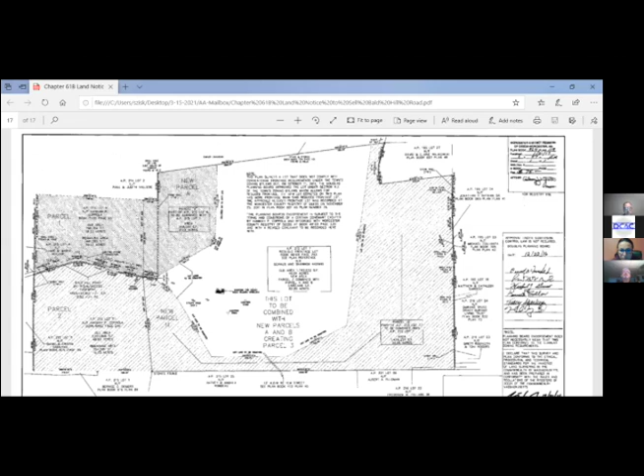So we could request the town to purchase that for $110,000. It's pretty isolated, I don't think there would be any use in it.

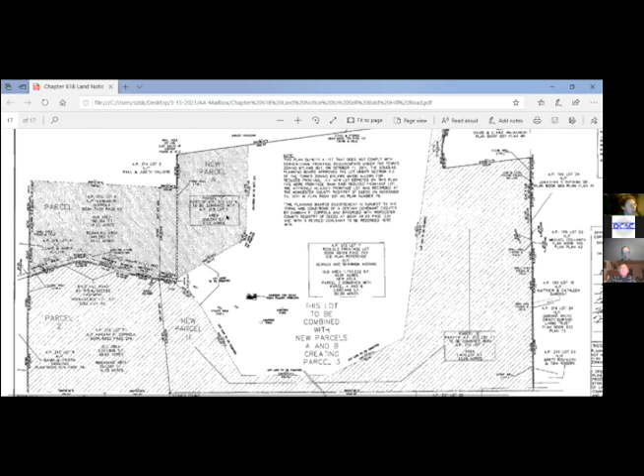I'm still trying to locate it, is it on the screen? Yes, you've got it on the screen. I also have the Bald Hill area jpeg up because that was on the Google Drive, and I'm trying to locate it in the town. All right, let me bring up the GIS. Off of Yew Street, and it's south of Snet, but not anywhere near Snet. It's many, many house lots away from that. It's a bit away.

Unplug your computer. Did you eat everything?

It doesn't look like Open Space had a meeting yet. There's nothing that says they have to go before us or after, there's no order, it doesn't matter, we're all independent of one another. I was just curious if they made a different recommendation, but based on what I'm looking at, I can guess what their recommendation would be.

Okay, so I'll entertain a motion to recommend to the Board of Selectmen to not exercise our rights for first refusal. If there are no questions, I would make that motion that we recommend to the Board of Selectmen to not exercise their right of first refusal.

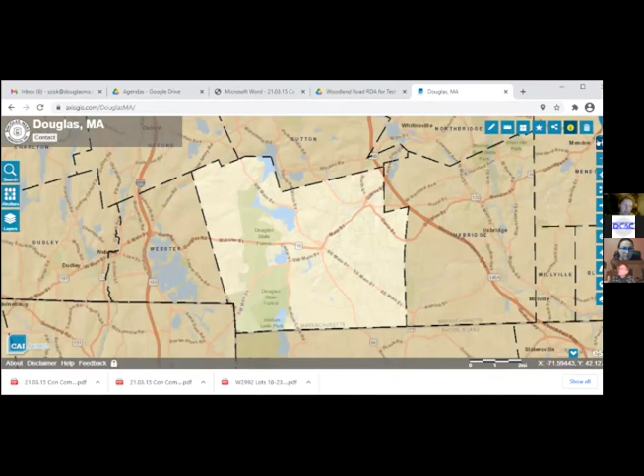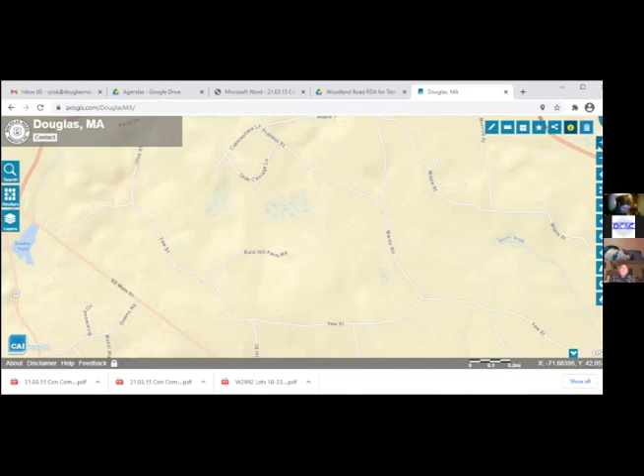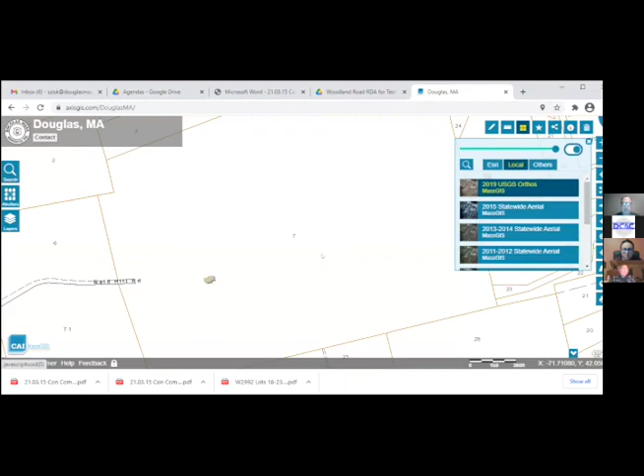As far as the wetlands, like at the entrance, there was nothing mapped. So besides the species, I don't know yet. That's pretty easy to figure out with the overlay. Just trying to get back there. So you can see there would have been noted some wetlands on that A&R plan, so they don't have any at the entrance at least. No, at their entrance, no. I'm just saying that would be the only way we would know jurisdictional areas for like a BVW or a stream that would have been shown.

Is this coming up on the screen? Yep, all right, this is it. So I know there's a wet area down below on this side. This is the area up in here. Could you just put the overlay on? The layers. Thank you.

Slow, yeah I know. See that now? Yeah, so we're talking about 6, correct? 7, oh 6, yeah, sorry, we're talking about 6. So there's nothing at the entrance. It's across the way, which that one is also for sale, so that one will be coming in front of us too, eventually.

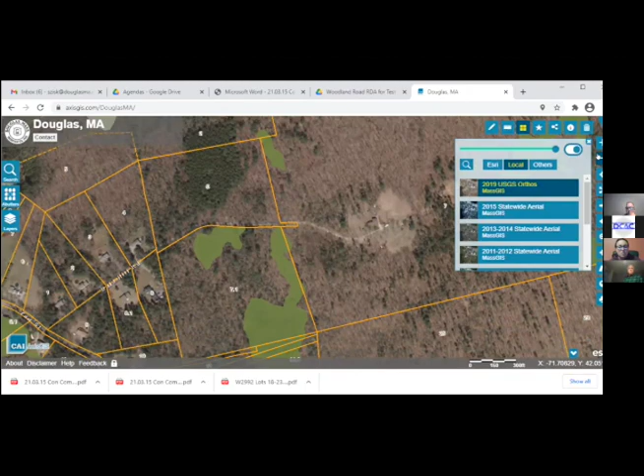Mark, do you want to see the wildlife overlay?

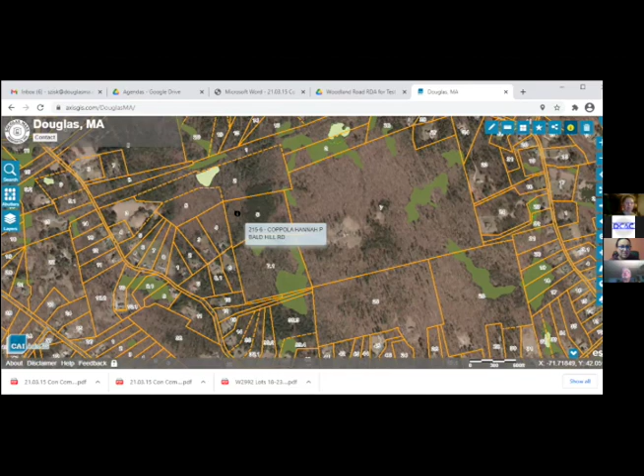Mark? Hello? Is everybody frozen? Where is he? I'm not frozen. Oh, he's gone? Oh, hi. Shh, okay, we lost him. So there's a motion, do we want to wait for him? Yeah, we probably should, where did he go? I'll wait, okay, I'm just gonna look up the Oliver GIS just to report back to him. Might be just a technical problem he's having. I'm sure.

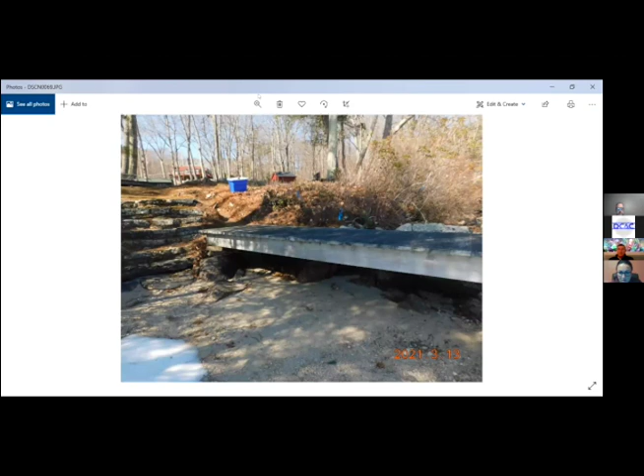I agree with you, Tracy. It seems like a repair should be covered and no additional permitting is required. If there's no additional impact on the water resource, we should be okay with it.

I'm going to assume there's no machinery and you're not planning on digging and pouring cement. No, absolutely not. Then it's okay, I think we're good. Everything's fine under the Wetlands Protection Act for a new dock.

So, okay, you're good to proceed. I'll drop off. Thank you, everybody. Thanks, Jack. You're welcome. Take care. You too.

So Steve, we probably should make a policy so that people don't need to come to us. I don't know how you would word it, but something like replacement of existing posts, not adding or expanding. We should kind of make a policy on that, because I think we're going to get more than one of these coming up.

Have people come before us for dock permits in the past? Not new ones, repaired really, not that we know about, we haven't filed an RDA. We have a situation where neighbors will tell and stuff, so I'm not sure what it's like down there. Him being a new homeowner with 2 docks, I figured just a CYA on that.

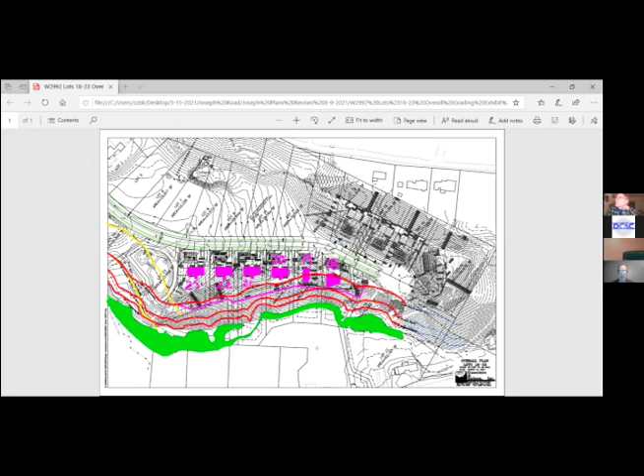I assume you're picking up which file you want to display. Yes. Okay, thank you. Can you see that? Yes, some bold colors in there. Oh, the engineer did that. So I think is Tracy back? No, she's away for a moment. Maybe I'll wait for her since she wasn't here. Okay, maybe. I'll meet you upstairs.

Okay, are you back? Sorry about that. So we've made some improvements. Could we just run down the line for number 18?

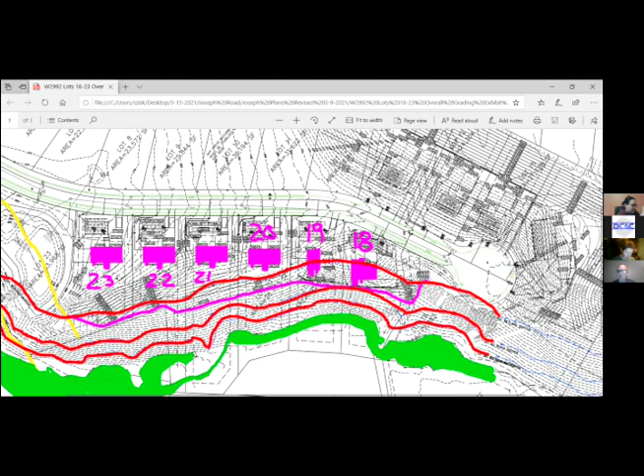Yeah, so I'll give you the overall view. Basically, 18 to 23 were discussed at the last meeting. They made a lot of revisions from the first meeting to the second meeting - this is the third meeting. And I think in a nutshell, 23, 22, 21, and 20 are all pretty much acceptable to the commission. They left it open in case changes asked on 18 and 19 affected those. I'm not sure the engineer can get into that, but I think these four were pretty much buttoned up. There were some issues with grading on 19 on the hillside and maybe some work in the buffer zone.

And then 19 and then 18, which we're on now - I think there were some questions on where, when they came in for the water line, this is a pretty steep slope and they had some grading in this backyard, and there were concerns on how this grading was going to erode down the hillside, and the use of the backyard and how to mitigate that issue. I think they wanted at least a little bit of a side yard for people to get around the house.

So I think the engineer is here, he can probably fill in a little more too. Thank you, Steve. For the record, John Federico with Guerriere and Halnon. That is correct for your kind of recap of everything. We did end up adjusting grades and bringing up TOCs and eliminating any sort of walkouts where possible.

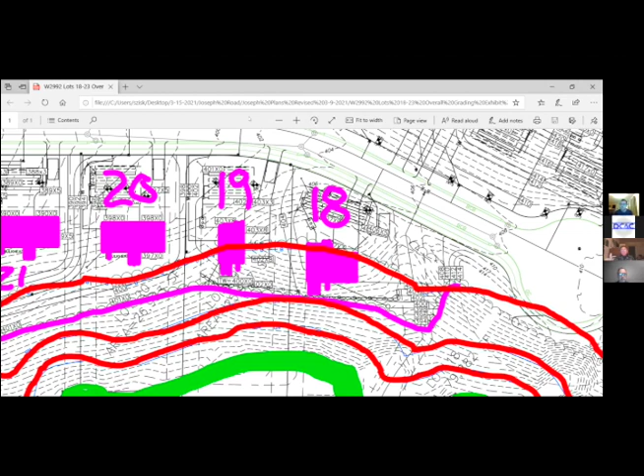I'd sure, those were also uploaded to the Google Drive. Steve, if you wanted to pull those up on your own. Do you have them too? You want to go through them?

Yeah, control, sure. John, if you don't mind, I can definitely pull them up for everyone. Cable, can you give John some access to the share drive? I mean, to the share screen?

You have access, John, or if not, I'll try. I do have access now. Thank you very much. Thank you. You're welcome.

Okay, great. Is everybody able to see a PDF of the plan up in front of you? Yes. All right, great. So this here is lot 18, and bear with me one moment. I can try to get a highlighter as well to kind of highlight some things.

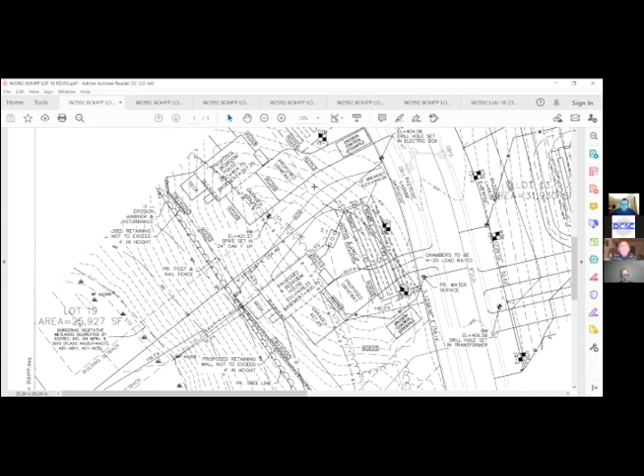When we last discussed, we had a generic footprint here. We ended up reaching back out to the developer to see what sort of house footprint he's going to be doing. The house footprint that is proposed here now is right through this area. Apologies for the color, I can try to double check that in a moment. But this essentially is the new main portion of the house with the garage located on the side over here.

This is a smaller footprint than originally proposed, but it is a little bit longer. So on this back side, we did get a few feet closer to where the wetland area and rear of the property line would be. But it's mostly occurring with the deck, which again would either be grassed underneath it or have some rock to allow for infiltration there, because we had such tight grades where our bulkhead was.

We want to try to provide a little bit of a backyard for privacy. We are proposing now along this edge right here, outside of the 50-foot no build, a short retaining wall not to exceed 4 feet in height. We would have the post and rail fence as a delineation marker between that area, as previously discussed, to act as our barrier there.

And then essentially we're just trying to help flatten out the grades in between the back of the house and the bulkhead area, again just to allow a little bit more privacy for the folks here. In terms of the erosion control barrier and the proposed tree line, nothing has changed since the previous meeting. Again, we were all working within our constraints just to try to give us a little bit more of a usable lot, and that's really all that's occurred here for real changes on this particular lot.

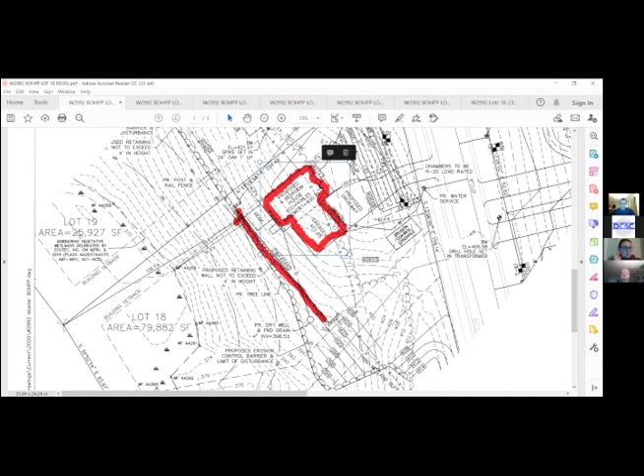Because there was a garage under before, right? In both cases, it wasn't going to be a garage under for these lots. We had garage sitting at about a foot lower than what our top of concrete was. Okay.

And while he's doing that, board, if we want to just think about any other questions for number 18.

With this new footprint, we're looking at about 1,526 square feet or so. Factoring in the little bump out in the front, I'd probably say would be closer to 1,600 square feet. The past footprint was shown at about 60 feet by 30 feet, so we were looking at about 1,800 or so square feet. So this footprint has been reduced by approximately 200 square feet.

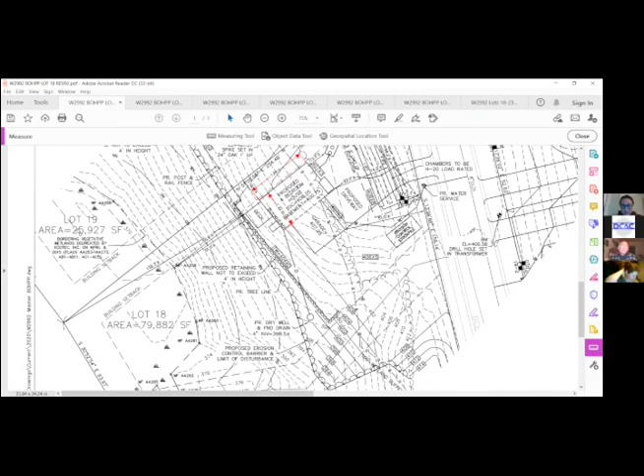So I will share, bear with me one moment here, for lot 19 as well. Okay, one moment. So next item on the agenda is at 8:02 PM, and it is the public hearing continued for the notice of intent, Joseph Road, lot number 19. That's 1008. All right, and I have lot 19 up here. Is everybody able to see this lot? Yes, all right, great, let's zoom in.

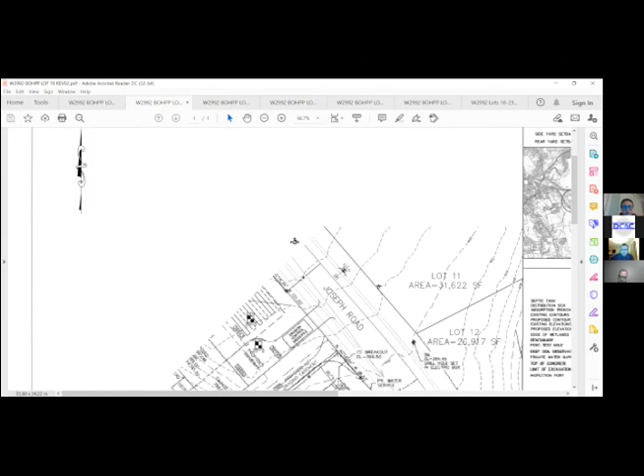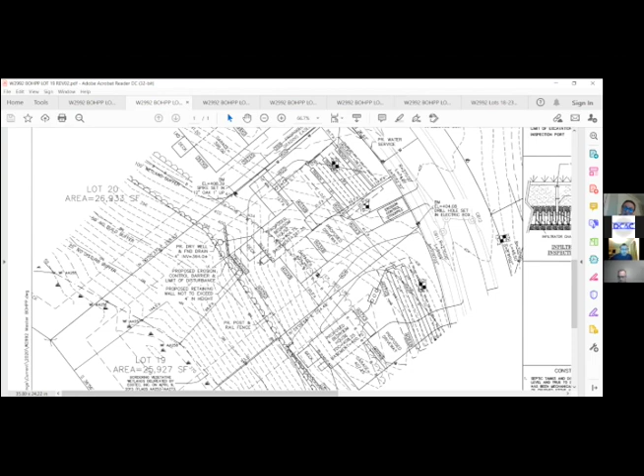Super. So with this one here, somewhat of a similar situation. We were able to acquire a building footprint for this particular lot. It is the same footprint that we are going to be using on lot 18. With this one here, we did again try to keep everything tucked as close as possible towards the right-of-way. And then with this lot, in terms of the grading, because of the slightly longer footprint and where things were going to be ending up, we are proposing just a very shallow 4 foot or less retaining wall located right here. The rest of this area would just be blended in at existing grade.

We are down to an elevation of 402 right here, and then it is sloping to 400 here, so water should be flowing this way, as well as a slightly higher elevation at 402.75, give or take, up by the house, just so we have a very gradual slope coming away from the house. With this one here, we are going to be proposing, again, a dry well just to help offset any potential impacts that the commission might be concerned with.

As of right now, erosion control and tree line is the same as it was in the last meeting. We just, again, were working with the constraints that we had to try to provide a little bit more of a safer area around the deck, in particular if they did have any sort of stairs or anything, so that they can navigate around there.

And then also too, with this footprint here, because we did get a little bit on the thinner side, I guess, in terms of width, if that's the best way of putting it, we did slide the house closer to lot 18, just to provide a little extra space over here, again, just so that this homeowner can have that usable yard space. And then that's really all that's occurred for changes on this particular lot, with also, sorry, the post and rail fence being proposed as that delineation.

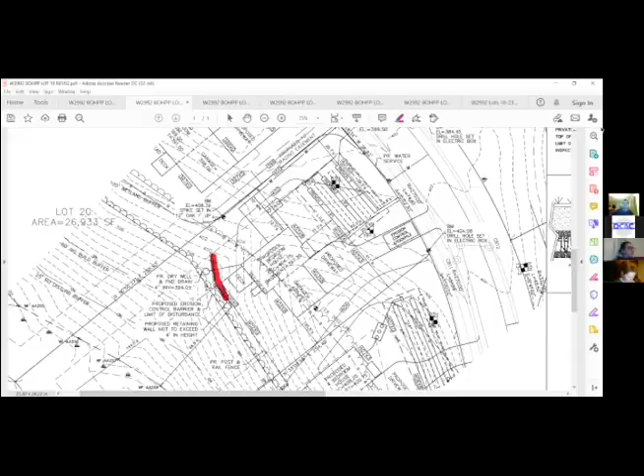Now I'll entertain a motion to issue the order with the same conditions as lot 18. I move that we issue the order with the same special conditions as lot 18 for Joseph Road. Motion's been made. I'll second that with the inclusion that the plan should be amended to include that retaining wall. Made and seconded, roll call vote. Art Bobbity, aye. Eric Harris, aye. Mike Greco, aye. Mark Manjamai, KG Dudley, aye.

Thank you. Okay, next item on the agenda at 8:10 is going to be lot number 20, 1009. I got this, and I do have that plan up in front of us right now. No changes for this plan have occurred since the last meeting, but since we do have a little bit of a closer up view here, we are proposing a berm at the top here of 401.

And then it does have about a 5 to 10 foot flattish area before it meets both 400 grades on either side. And then from there, all the water is sloping towards the backs of the houses. And then there will be a small swale that will pick up everything, carry them across the lots over to that detention area as previously mentioned. We do not have any sort of runoff that would be going down towards the wetland area for these lots.

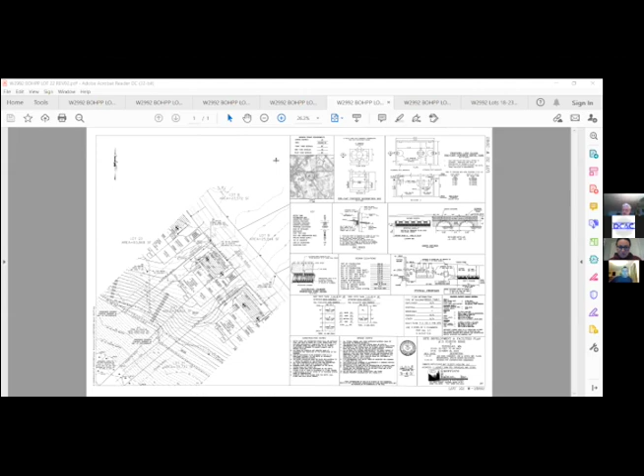For this lot, similar to both 20 and 21, we did revise grading on it. Everything is going to be flowing towards the house from the hillside, flowing away from the house into a small swale, collected and then put into the detention area. Anything in the front portion of the house will be directed towards the street system and then eventually into the detention area.

Okay, very nice. Board, any comments or questions on this lot? These are all bulkheads now, no more walkouts, right? No more walkouts are being proposed. Okay, thank you.

Okay, anyone in the audience have any questions or concerns in regards to this hearing? Do we have a person on the phone calling in for this? Not hearing any. Okay, I'll entertain a motion to close the public hearing. So moved. Seconded. Motion's been made and seconded, 8:17 p.m.

Roll call vote. Art Pompey, aye. Eric Harris, aye. Mike Greco, aye. Mark Mangum, KG Dudley, aye.

Okay, thank you. Entertain a motion to issue the order of conditions. I move that we issue the order of conditions for lot 22 Joseph Road. Second. Motion's been made and seconded by Mike.

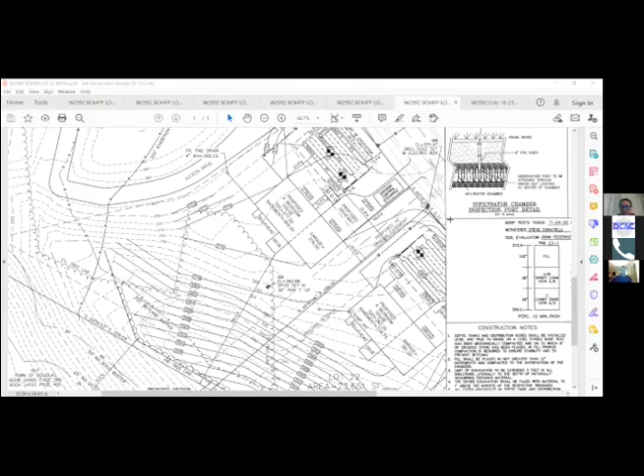Thank you. Okay, last but not least, public hearing continued, NOI Joseph Road, lot number 23, it's 1012. All right, great. I have 23 up in front of us right now.

So with this lot, no changes since the last meeting, but Tracy, since you weren't here, we did end up initially having grading that stretched out into where this riverfront buffer was. Currently, all the grading is terminated before that buffer. Tree line is left as it currently stands up to that point.

And then we are still proposing 3-to-1 slopes along the backside, a small swale to catch anything from the adjacent lots. The detention area is just to the north, and everything would be ultimately outfalling over there. As mentioned, all these lots, no walkouts are being proposed. Everything is a bulkhead currently.

Okay, that was a good move with no riverfront area. So I appreciate that. Board, any other questions or comments on this lot? Really quick, did you say the tree line was being retained? Wherever the tree line currently is out there. No additional impacts inside the riverfront buffer are being made to it. Okay, thank you.

Does the water flow over that access drive, or is there a structure that takes it? Yes, the intent would be for the water to flow over it. If we did have to put in a small pipe or something, in the event that it would erode anything there, we can work accordingly to do so.

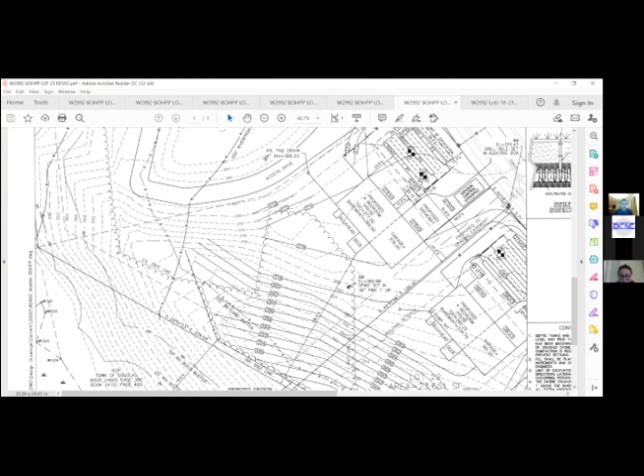Okay, anyone in the audience, public, have any comments or questions on this? Not seeing anybody new. I'll entertain a motion to close the public hearing. I move we close the public hearing for lot number 23, Joseph Road. Okay, motion's been made. Second.

Mike Greco had the second on that, at 8:20 PM. Roll call vote: Art Mopney, aye. Eric Harris, aye. Mike Greco, aye. Mark Mungum, KG Dudley, aye.

Entertain a motion to issue the order of conditions. I move we issue the order of conditions for lot 23, Joseph Road. Motion's been made, seconded by Mike. Roll call vote: Art Mopney, aye. Eric Harris, aye. Mike Greco, aye. Mark Mungum, KG Dudley, aye.

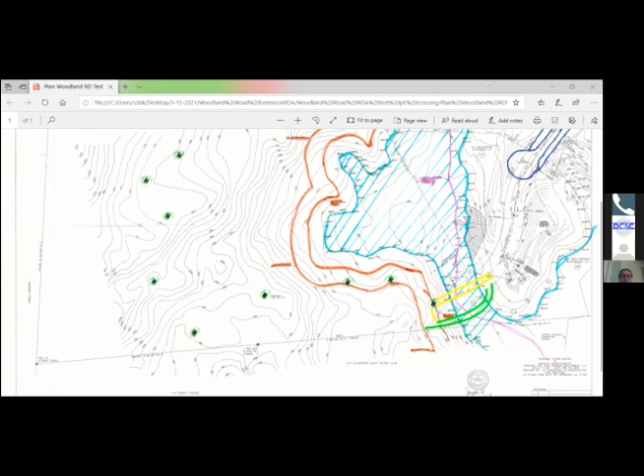So we've got a little plan up. Steve, is anyone here presenting? Jack: Yeah, this is Jack Nealon, representing Deer Crossing Development, and I believe Dave Marquardt is on as well, who drew the plan. What are you requesting in this RDA?

We are looking to cross the wetland for about 24 to 36 hours to go back and do some soil sampling as designated on the plan. Woodland Road continues to run near where those soil pits are, and we're just going to do some examining to see what we're getting ourselves into. So we figured we'd take advantage of the frozen ground to cross right beyond where the road ends now, and then make our way up back for the day to just dig those pits and then remove ourselves.

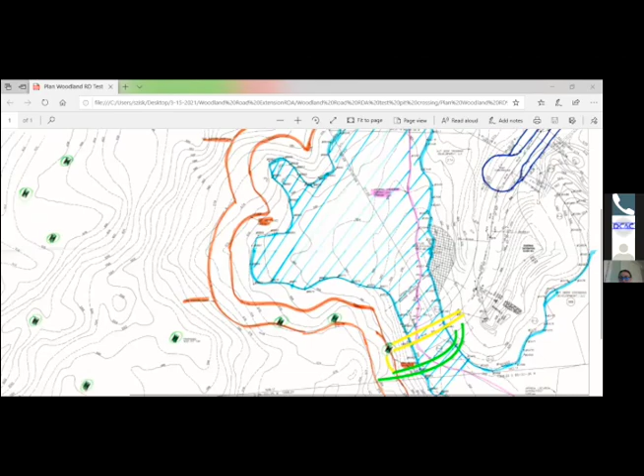Okay, so is it flowing right now at all? Is it wet at all? It is not flowing right now, no. I believe Steve walked it on Saturday as well.

What kind of equipment will you be using? Yeah, so it's a mini excavator with a rubber track and about a 2.5 foot bucket, which is probably the smallest we can use to actually get back there and get what work we need done in a day. I sent a picture of the machine to Steve today, so I don't expect him to have it up, but it's just a mini excavator from Koopman's Lumber. You guys can go down and take a look. A Bobcat type of thing? Exactly, yep.

Board, any questions? So you're going to do this within like 24 or 48 hours, to get a chance to do it before it warms up again? Yeah, we're actually doing it on Thursday, and we think we should be done by the end of the day Thursday. But if not, maybe the last 2 holes on Friday morning, depending on how it goes getting over there. Thursday is supposed to be 55 degrees. Yes, Thursday is.

So are you planning to cut any trees down or knock any trees down? We don't think we'll have to where the wetlands crossing is. If anything, we'll just have to limit so we don't scratch the operator or the machine, but we're not gonna have to take down any trees. It's only 70 inches wide, the machine, so it's kind of like taking a small car through there.